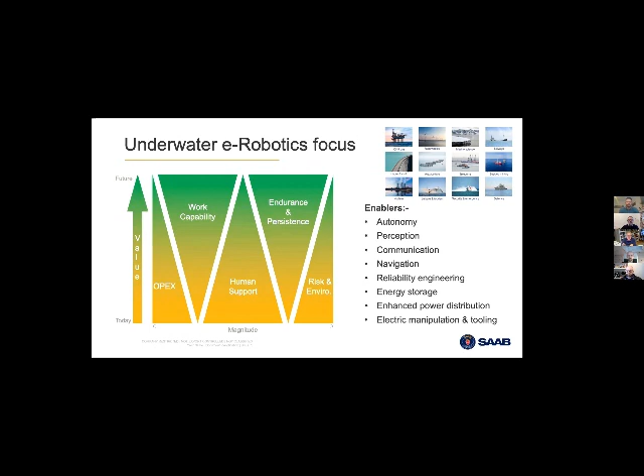Whatever the operational scenario, or indeed the market sector, whether it be offshore energy, defense, marine science, or others, the drive with these developments is much the same. It's to increase the operational value of the robotic system through the reduction of operating costs, increasing work capability, reducing human support, increasing endurance and persistence of robotic systems, whilst at the same time reducing risk and impact on the environment. These are some of the key enablers that support this plan, and I'll touch on developments relating to most of these during this presentation. So firstly, looking at the development of conventional tethered electric ROV systems.

Observation tasks have been the domain of the electric vehicle, while survey and work tasks have generally been the domain of the hydraulic vehicle, and this has been slowly changing over the years. Electric vehicles first started life as pure inspection vehicles carrying a camera and maybe a sonar, but they soon grew in size and capability and intelligence, and before long, compact work vehicles were introduced that could carry a reasonable amount of tooling. And so the lines between observation and work class vehicles started to become a little blurred.

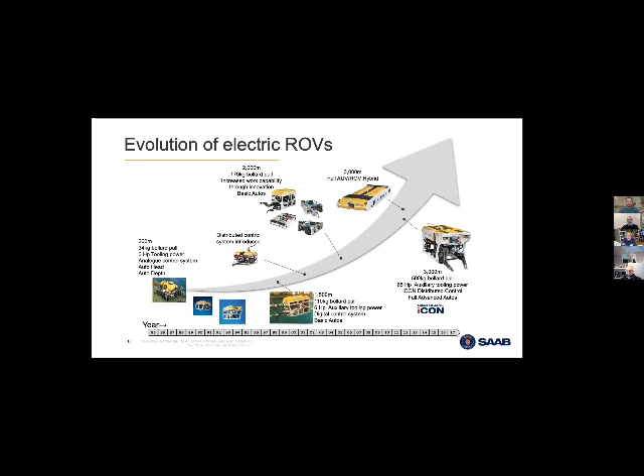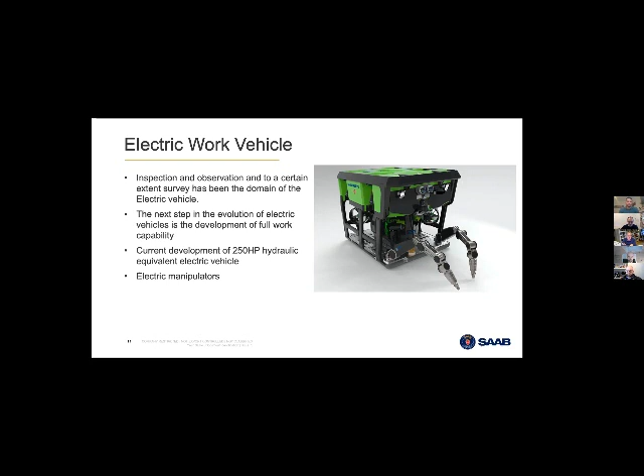Today, we have proven autonomous vehicles that can carry out extensive survey work, and electric work vehicles that can perform all but the most demanding of work tasks. So what's next? Well, the next logical step is the development of a full-blown electric work vehicle that can carry out all tasks conventionally done with hydraulic work vehicles. There are already several fairly large and capable electric vehicles working in the market today, and our latest development is an all-electric equivalent of a 250 horsepower hydraulic vehicle. In this case, it has electric manipulators.

So why go for an electric solution? Well, apart from generally having a lower cost of ownership, there are quite significant environmental benefits. Less oil, lower risk is a benefit, and they're generally more efficient, requiring less power, which for some of these modes of operation is really important. Another key reason is that it's easier for more digitalization and automation, which really helps unlock these remote and autonomous modes of operation that I'm going to talk about.

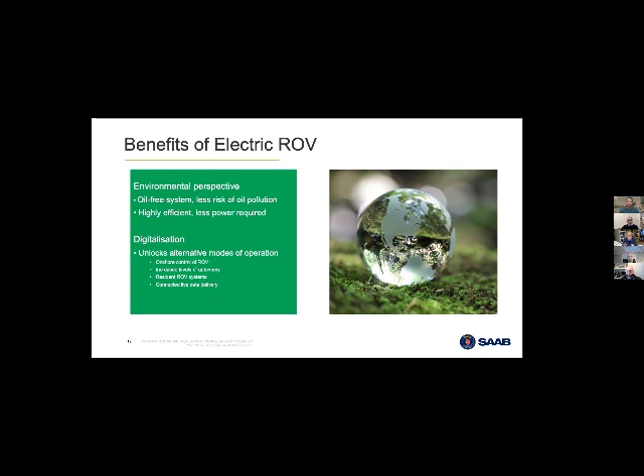One of the main challenges, however, for the electric work vehicle is tooling. Much of the tooling on the market today needs a hydraulic supply. However, most tools actually require a relatively small amount of power compared to propelling the vehicle. So a relatively small HPU can be used to deliver what's required for most tooling.

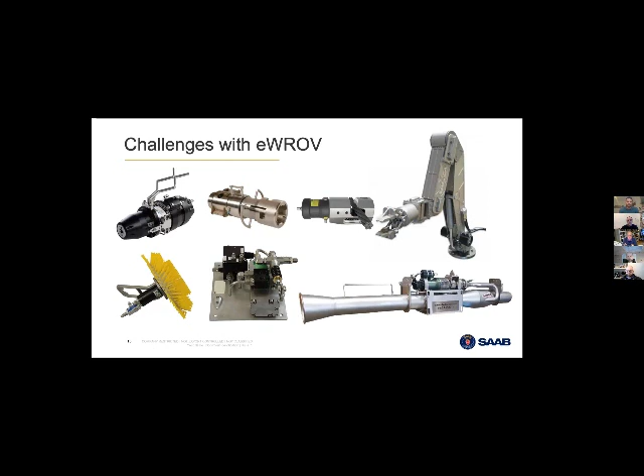In the past, the challenge with electric thrusters has been the power output when compared with hydraulic thrusters. To date, most electric thrusters have lagged behind hydraulic in terms of performance, but our latest SM14 thruster is able to produce a higher thrust output than a similarly sized hydraulic equivalent, so it's a win-win with higher efficiency and higher thrust. But to really maximize the potential for electric vehicles, the tooling needs to be electrified as well.

Electric tools for some tasks, such as cleaning and pumping, have been around for a while, and several electric torque tools are now available, which are smaller and lighter than their hydraulic equivalent. But a key development has to be the manipulators. Today, with the rapid advances of robotics above water, there are less technical barriers to achieving the required underwater ROV performance.

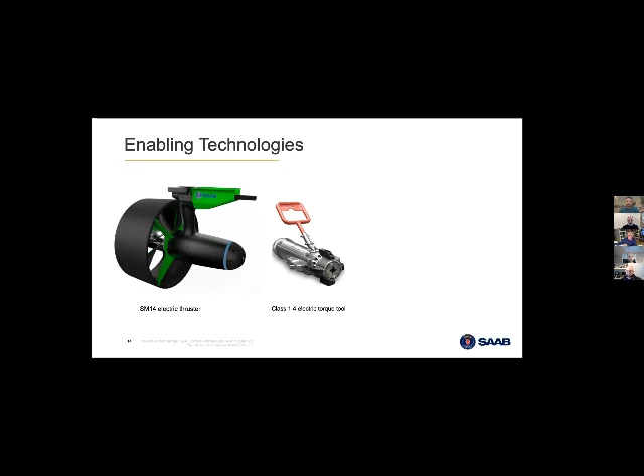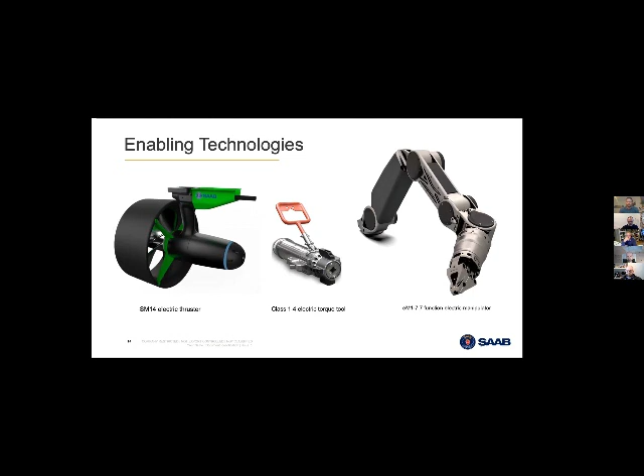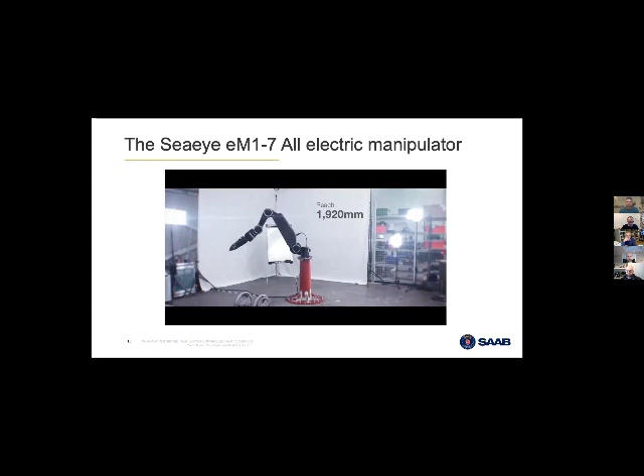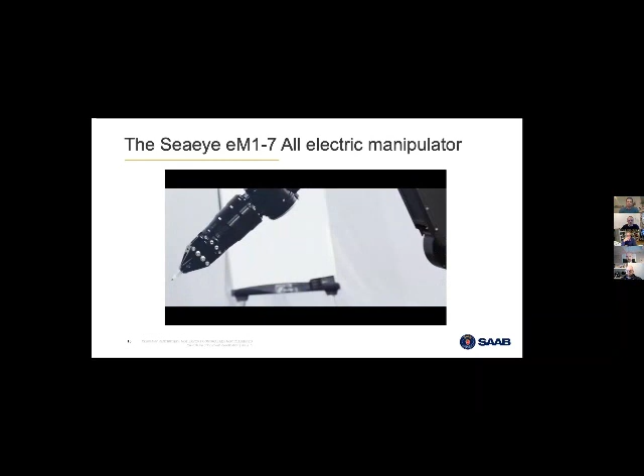The image on the right is of our latest 7-function electric manipulator, which exceeds the capability of the current industry standard hydraulic manipulator. Being electric, it has the same benefits as an electric vehicle. This video shows the eM1-7 electric manipulator in action. One of the key things about this manipulator is the repeatability of its position. And this is really important for developing autonomous and step-by-step semi-autonomous operations.

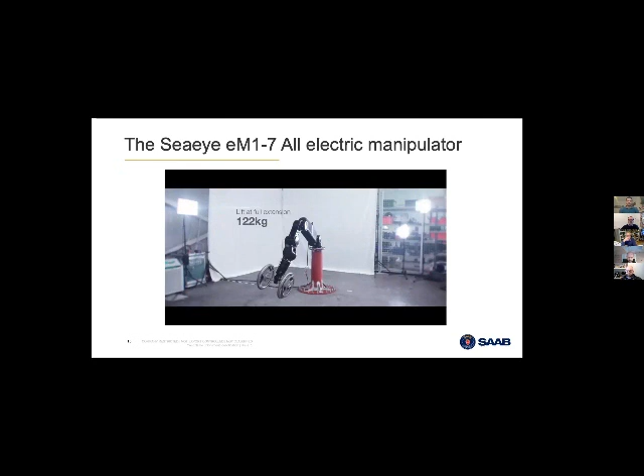It's been something that's been talked about for quite a few years, but the next developments relate to ROVs and vehicles being hosted for unmanned and lightly manned vessels. It's really starting to gain traction in the industry and is a significant cost saver. To illustrate Saab's developments, I'm going to talk about a multi-shot mine neutralization system, which is a defense program developed to produce an ROV deployed over the horizon from an unmanned surface vessel. It's a joint UK-French development program involving Thales, ASV, and Saab.

The objective of the system is to be able to relocate a potential mine found via sonar, identify the mine type, and then dispose of or immunize and support recovery operations of that mine. One of the biggest challenges is that those operations have to be conducted in up to 4 knots of current and up to 300 meters water depth.

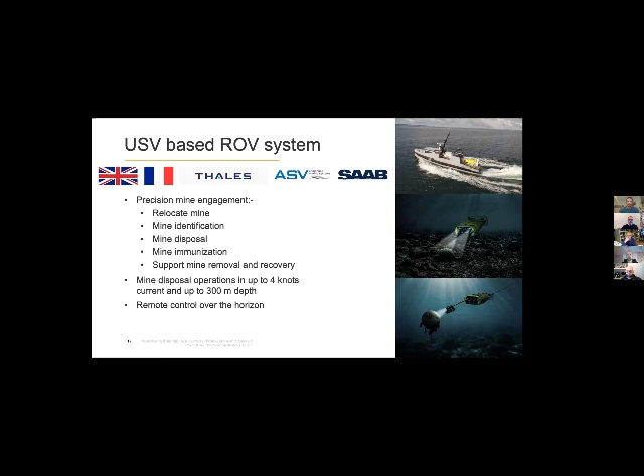Another big challenge is that it has to conduct operations over the horizon, away from the mother MCMV vessel. Whilst a vessel is still required today to control the unmanned surface vessel and the ROV system in this particular case, the main benefit of the system is to take that $200 million vessel away from the minefield and, more importantly, remove the operators from the vicinity of the minefield.

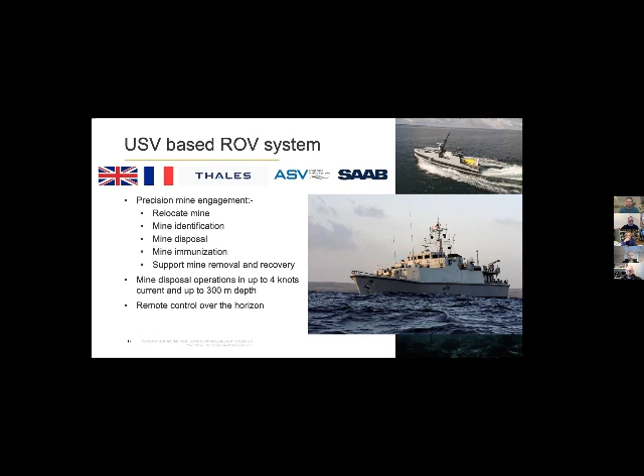As I say, one of the biggest challenges was the need for over-the-horizon operation via a radio link. The link between the host USV and the mother vessel suffers from relatively low bandwidth at 3 megabits per second with a latency of 250 milliseconds. And in bad weather, 100% uptime cannot be guaranteed. Whilst the vehicle is remotely controlled with a human in the loop, the MCM vessel personnel have much else to concentrate on, apart from the complex task of flying a remotely controlled vehicle that's located miles away.

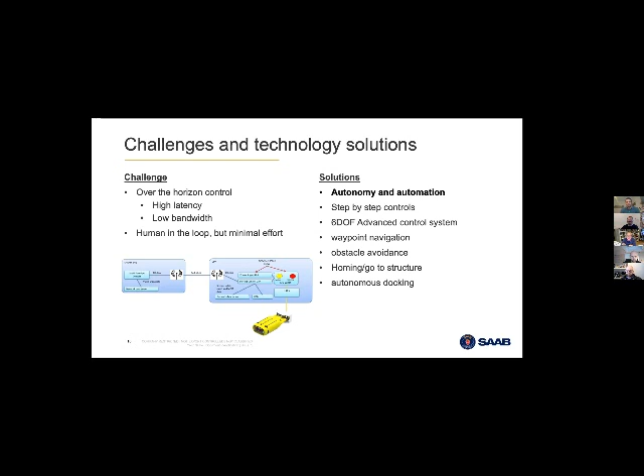The solution called for a change of mindset from a conventionally controlled vehicle to an autonomous vehicle with closed loop positional control that can be supervised by a human rather than directly controlled by the human. The MCMV operators, potentially managing multiple assets at the same time and potentially not being ROV experts, require the use of autonomous behaviors during the operation and launch and recovery. Here, hopefully, you can see the system undergoing sea trials.

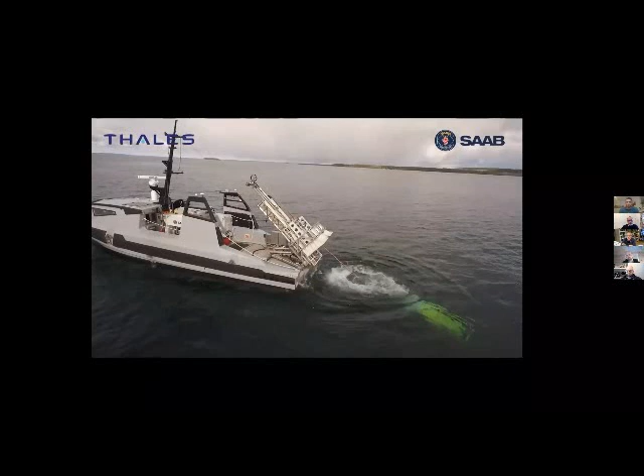Firstly, there needs to be a command decision to prepare and then launch the vehicle once the USV has arrived on location. The winch, tether, and vehicle all have to be managed simultaneously to ensure no tether entanglement with the USV thrusters. The vehicle executes the launch automatically and then goes to a safe distance from the unmanned surface vessel. Next, the vehicle transits to the suspected target with waypoint navigation and obstacle avoidance.

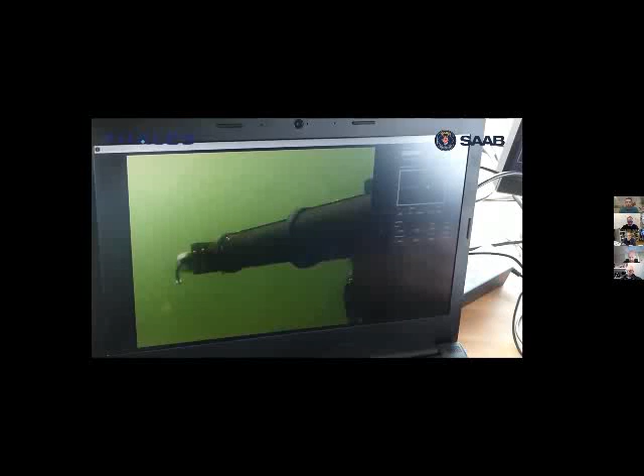And then the mine inspection is automated, and any engagement with it is handled by step-by-step control. Having placed the charge, the vehicle transits to the next target, repeats the cycle, and then ultimately, having deployed 3 charges, returns to the USV for automatic recovery and reloading.

There's a need for fallback behaviors should the comms link fail and to minimize the operator workload. So returning to the USV for recovery also needs to be automated.

Another similar program we've undertaken is with Boeing for a submarine launch vehicle system. The aim of this system is to be able to conduct inspections or intervention tasks anywhere from deployment from a submarine that can travel for some weeks, covering a distance of thousands of miles. The removal of a large surface vessel and associated crew obviously has the potential to save substantial operating costs, as well as the possibility to conduct discreet operations.

Due to the remote nature of the submarine, the comms link to the submarine is via a satellite link. And in order to operate over that kind of link that has limited bandwidth and very high latency, the advanced vehicle control system allows for station keeping, again, with measured step-by-step control and point and click operations to guide the vehicle to the task. Meanwhile, a single video and sonar link are transmitted back for confirmation of the last control inputs before taking the next step.

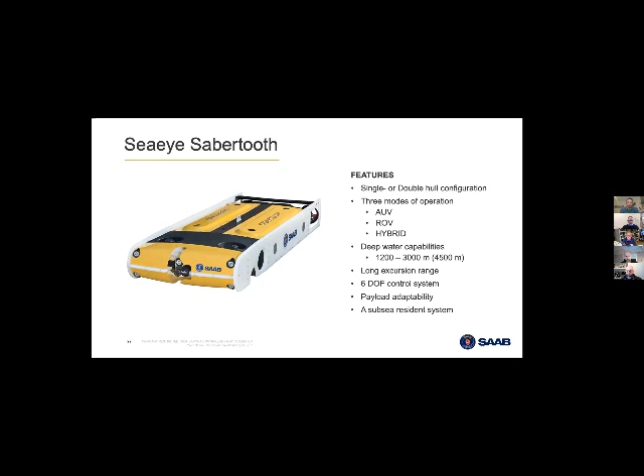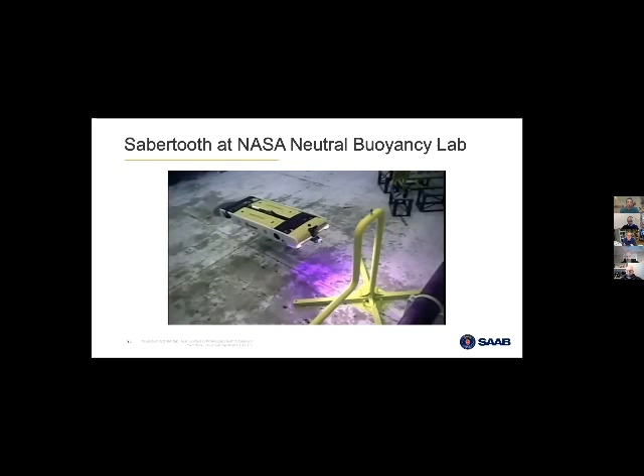Many of you have probably seen this video already, but it's the best I have showing the capability in clear water. And although it's a few years old now, it's still very relevant to the developments of today.

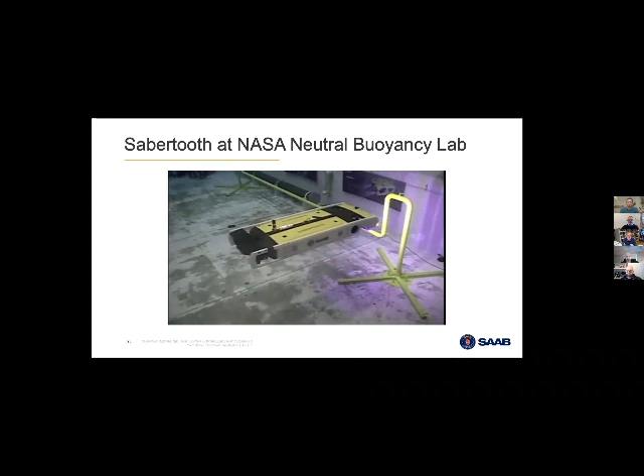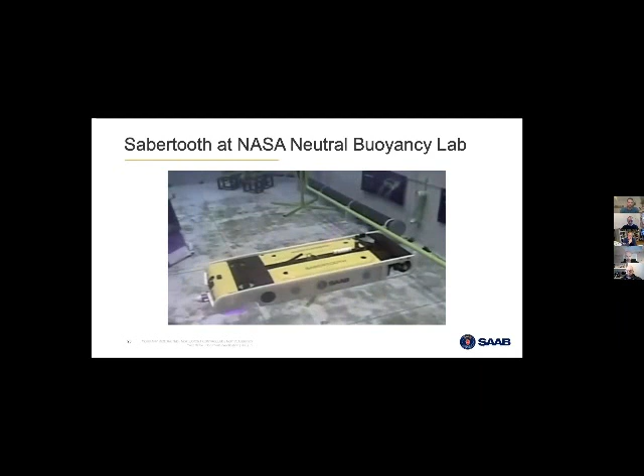So what are the challenges? Well, industry adoption is one challenge. There are now quite a few systems operating, but most are conducting fairly shallow water survey operations. Another big challenge is working at depth.

Recently, we've been running both autonomous and tethered operations at 2,000 meters at speeds of up to 4 knots, whilst maintaining basic communications and positioning from the surface. The high-speed descent of this kind of vehicle is typically 3 times the speed of a winch, so operating without a tether can improve operational efficiency.

The final development I'd like to talk about is subsea resident vehicles being installed long-term on the seabed. Vehicles of both the autonomous and semi-autonomous variety, resident on the seabed for extended periods, again have the obvious potential to save significant vessel costs. One of the key enablers for resident systems is docking.

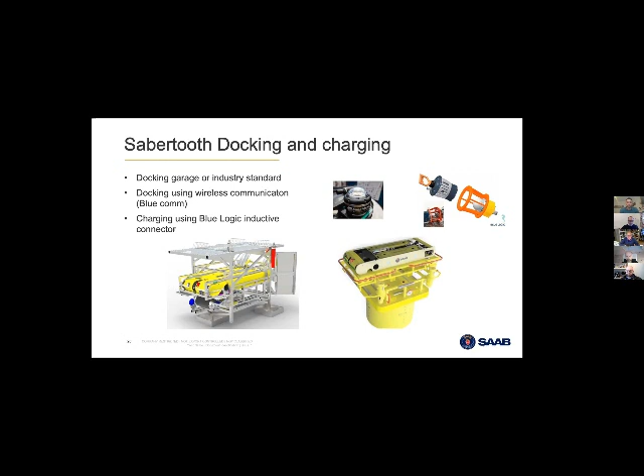And here you can see both an in-house developed docking station on the left and the Equinor standard docking station on the right. In order to control, charge, upload and download mission data, a safe vehicle dock is required, and there is benefit in finding and locating the docking station autonomously, either for efficiency or in the event of a loss of communications. In these 2 examples, docking is controlled by a pilot using step-by-step controls through a Sonardyne BlueComm free space optical modem, and data download and charging is achieved using the BlueLogic inductive connector.

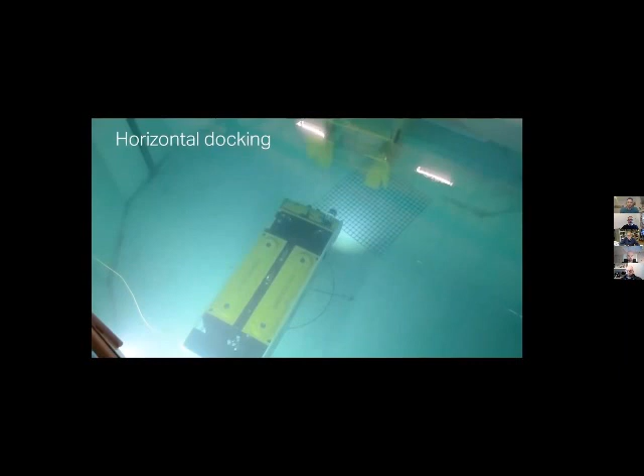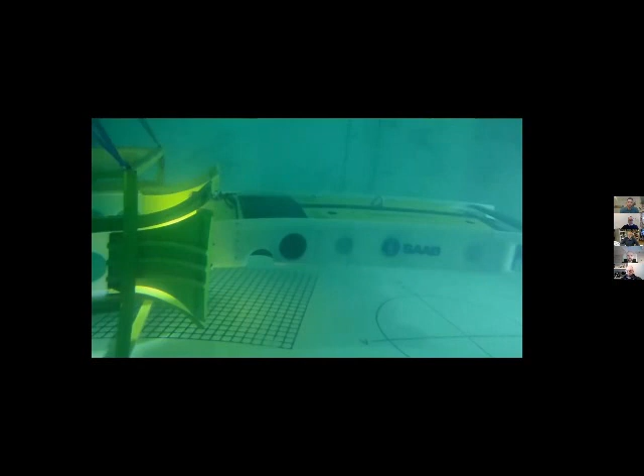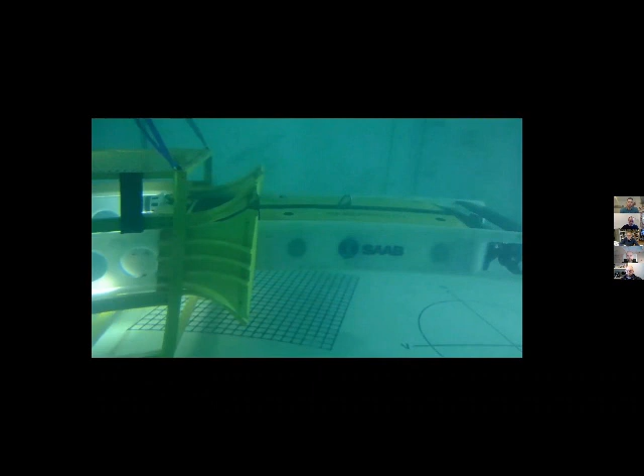To show the docking for real, I have a short video. In this clip, you can see the vehicle and docking garage in a clear pool for illustration, but it's routinely conducted at sea. This is in manual control, but it's already been successfully done many times autonomously using the docking garage arrangement with twin acoustic transponders mounted on the mouth of the garage. You can see the BlueLogic connector mating with the docking garage configuration for data transfer and charging.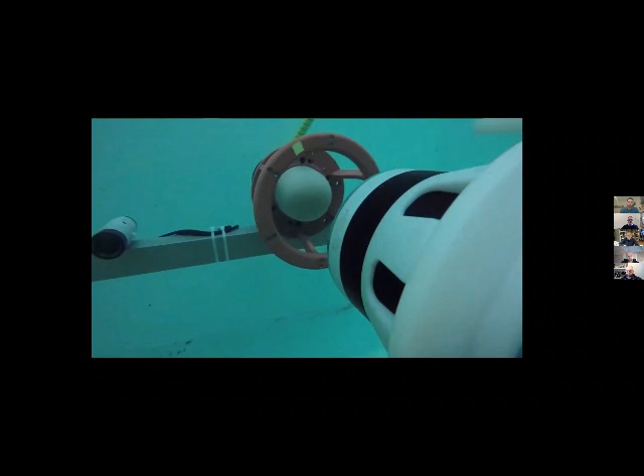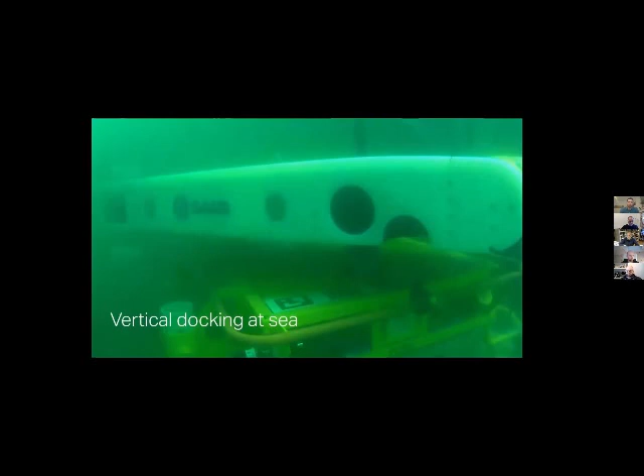In the second clip, the vehicle is docking vertically to the Equinor docking station without physical guides. This is under step-by-step control.

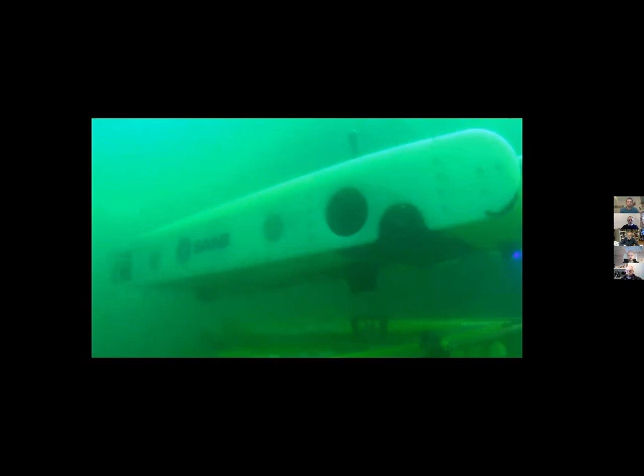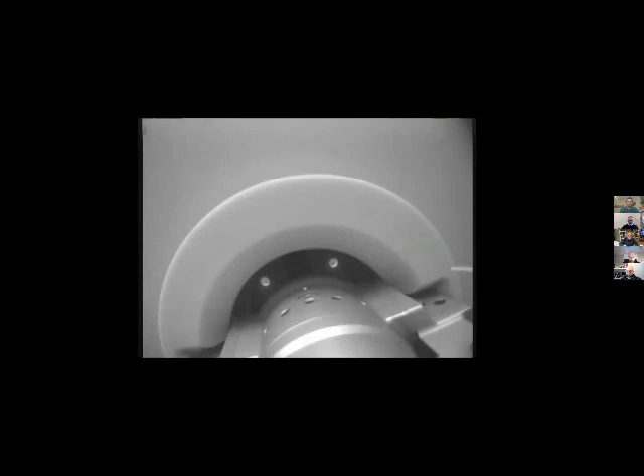As the vehicle undocks to fly away, you can see the BlueComm system used for transmitting the control and video link between the untethered vehicle and the docking station. And then in this final clip, you can see the mating of a torque tool on the front of the Sabertooth into a receptacle on a valve panel. Again, the BlueComm was used for control comms and video with the optical transponder mounted on the valve panel.

The next step is auto docking. With further work and suitable sensors defined, it will soon be very possible to dock autonomously to Equinor's standard docking station. Several challenges have been set by Equinor, who are driving towards resident systems, and these are now being accomplished.

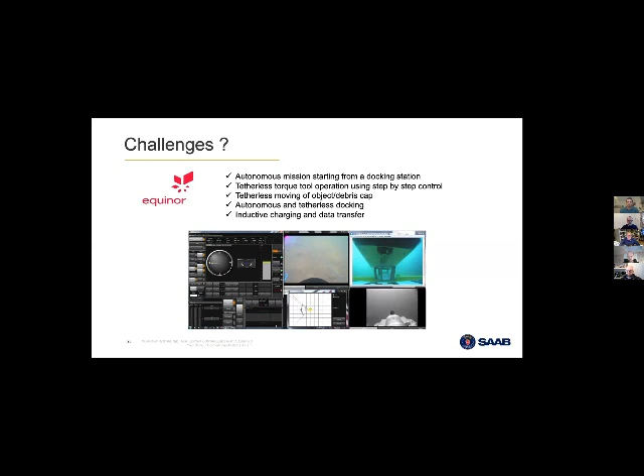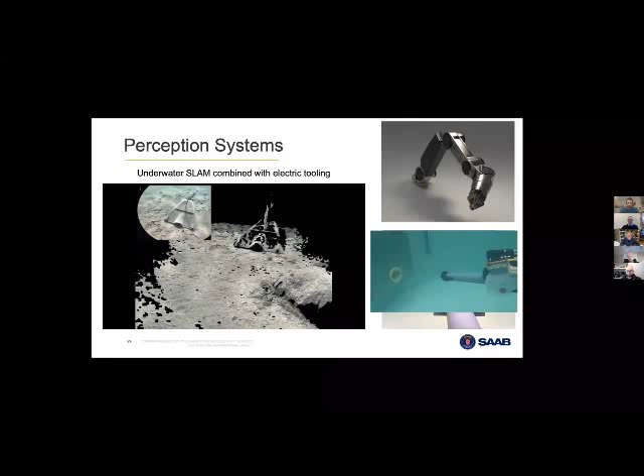Saab has a 3D visual-based underwater simultaneous localization and mapping system, or underwater SLAM for short. And this advanced system builds up a 3D point cloud of the environment in real time. The green snail trail here shows the position of the vehicle sensor relative to the surrounding point cloud. As well as a means of object tracking and vehicle station keeping, the operator can interrogate the point cloud data in real time to help classify objects.

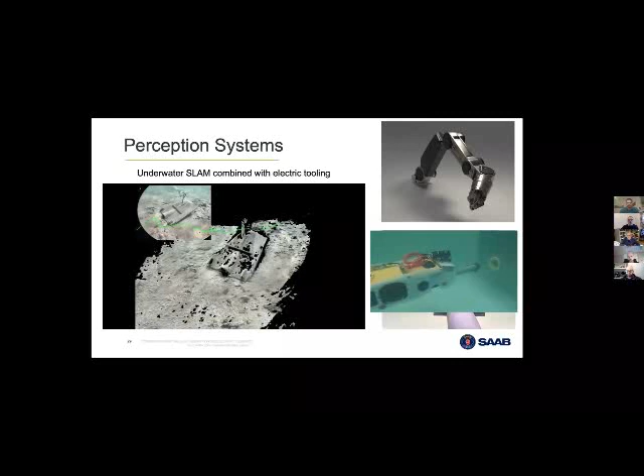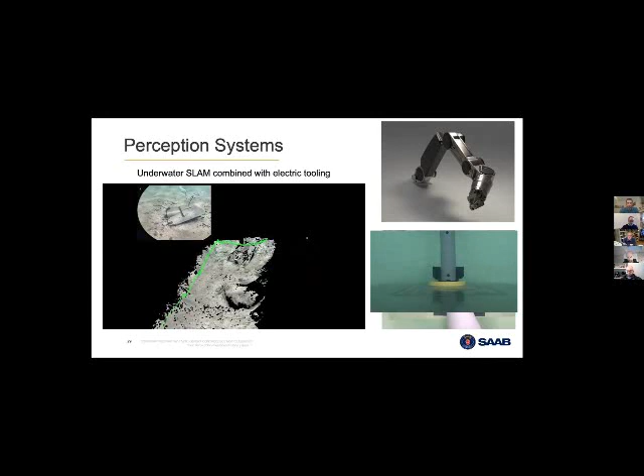With this accurate real-time 3D data acquisition on the vehicle possible, combining it with precise electric tools such as the electric manipulator and torque tool will soon be allowing automated manipulation of objects and valve operations to be even more efficient. And finally, the video clip on the right is from trials where an ROV system was positioned using this 3D SLAM system and automatically inserted a torque tool into a receptacle. Again, really important for low bandwidth connections.

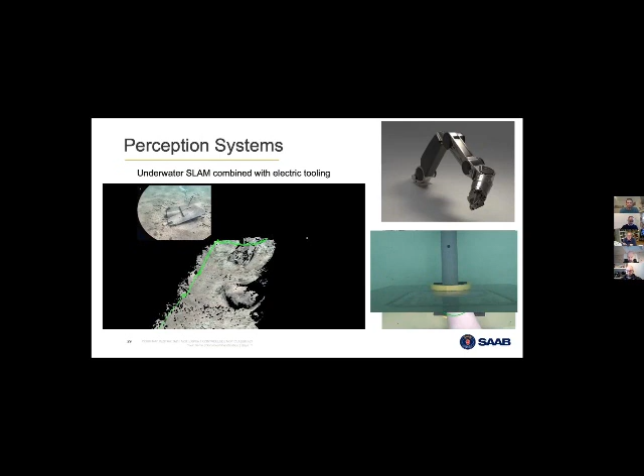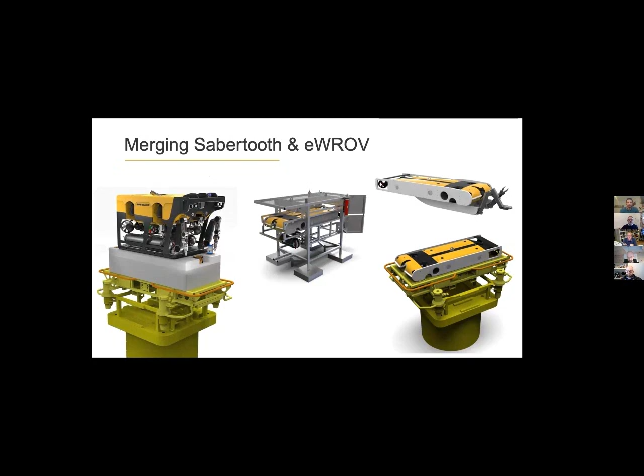Finally, we're looking at how all of these technologies and the vehicle platforms themselves converge. Some of the work going on just now is to augment the Sabertooth hybrid vehicle with more tooling, and even to augment the ROV with batteries and autonomy to facilitate tetherless resident operations. So I hope you can see how all these developments in the electric vehicles, the manipulator, the autonomy and automation, the perception and comm systems do indeed all come together for complete electric underwater robotic solutions that can reduce the dependence on vessels and people offshore to save cost, increase safety, and reduce the carbon footprint of underwater operations.

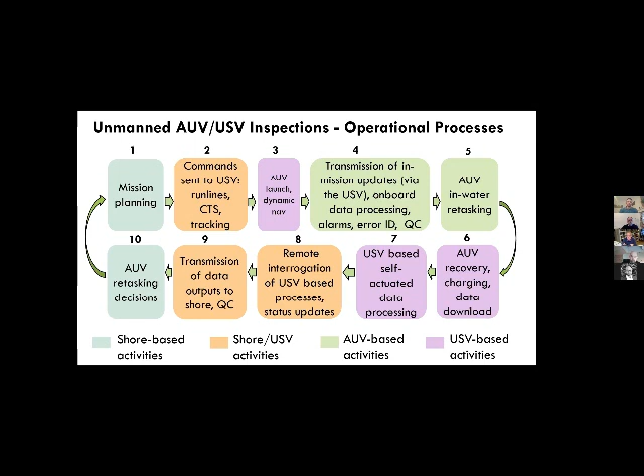So running through the objectives of the project in very brief, primary objectives of the first two phases of the project, which was undertaken, were process and procedure development for unmanned subsea pipeline inspection, utilizing the combined USV AUV survey platforms with operations control from shore. Development of software and functionality allowing pipe tracking, automation of eventing, alarm generation, automated data processing workflows, QC and analysis, navigation aiding, and in-mission retasking.

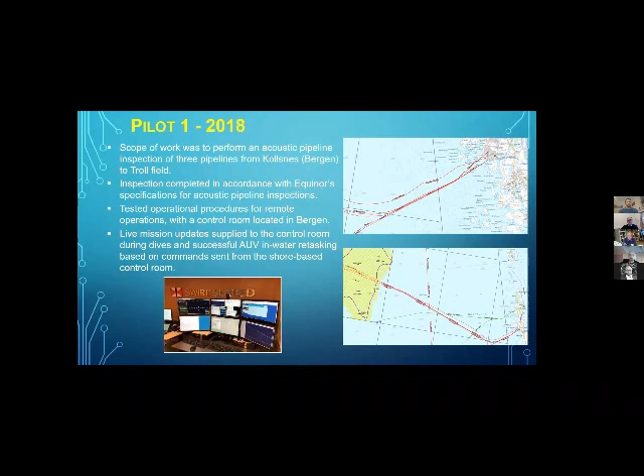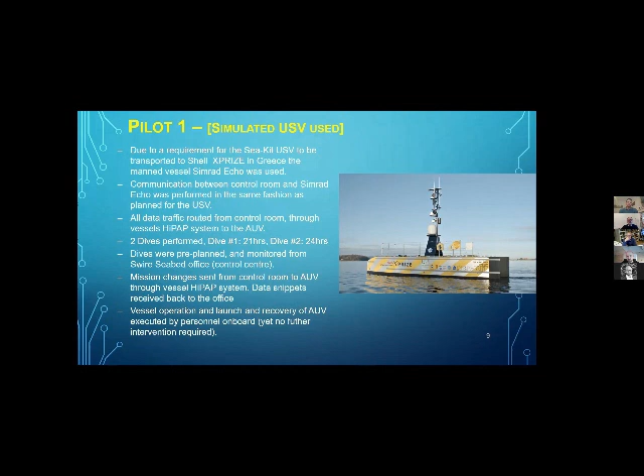In pilot one, the SeaKit Maxlimer USV was planned for the project, yet due to a clash of timing, was not available. As a result, we needed to resort to using a manned vessel, which simulated the role of a USV. Operations were still completed in the same manner with command and control situated on shore, major change being manual AUV launch and recovery. There's the vessel which was used.

In, one second, sorry.

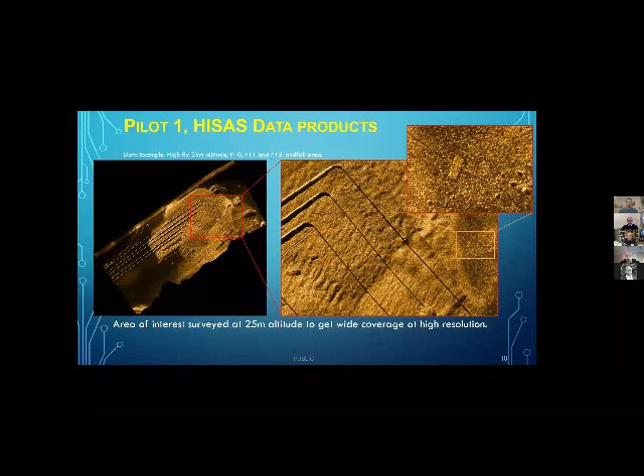Yeah. Here is an example of some of the data collected during pilot one, taken from AUV HISAS at 25 meters altitude. Multi-beam echo sounder data clearly reveals an area of free span detected on one of the pipeline routes. An example image of an area of interest collected by AUV payload cameras.

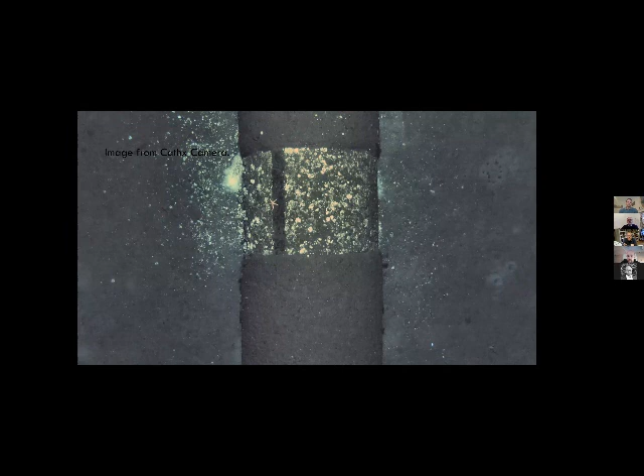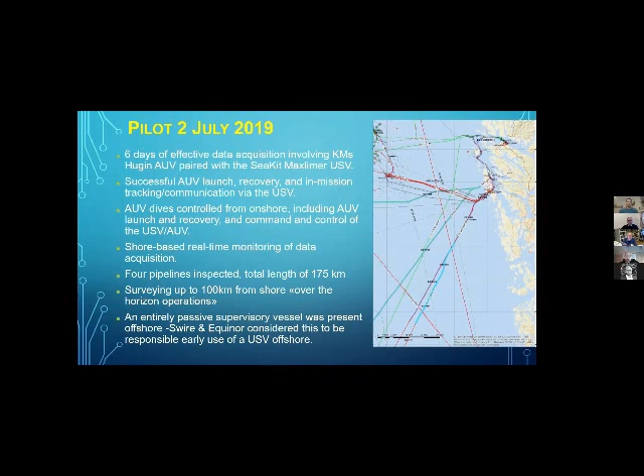For pilot two, we were able to utilize the Hugin paired with the SeaKit USV. During missions, successful unmanned launch and recovery was completed offshore. Data acquisition was controlled and monitored from shore, and 4 pipelines with a combined length of 175 kilometers were surveyed. The operation boasted a world first for over-the-horizon commercial pipeline inspection using unmanned platforms, with pipelines being surveyed up to 100 kilometers from shore. This video was taken during pilot 2 and shows offshore unmanned recovery of the Hugin by the SeaKit USV.

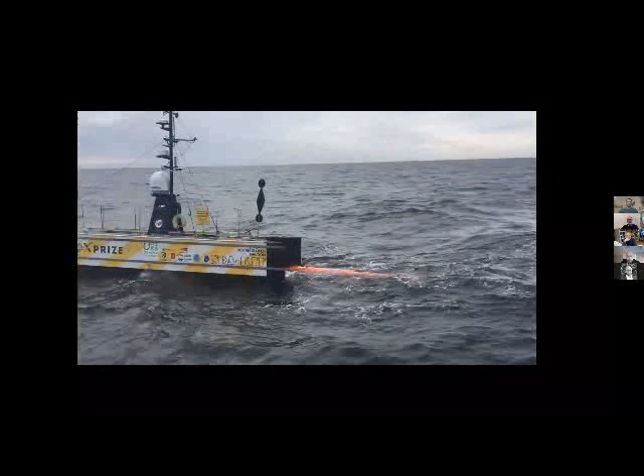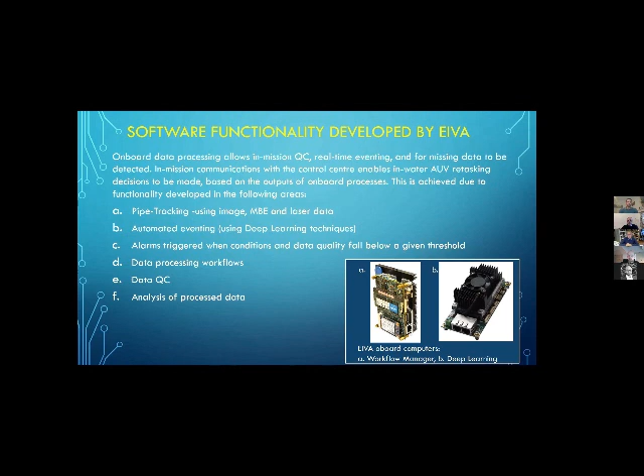During the project, EIVA developed software functionality which was installed on 2 boards integrated into the Hugin AUV. During the pilot projects, the deep learning board was used primarily for pipe tracking using image data, and the workflow manager board enabled data processing to begin on board the AUV, for alarms to be communicated to shore, and for data QC and analysis. You can see below an example of the deep learning pipe tracker method implemented on the deep learning board, which ran in real time during missions. Results generated from this allowed identification of top of pipe.

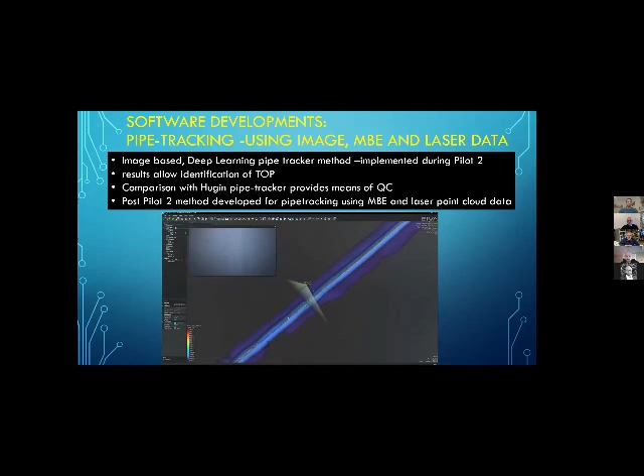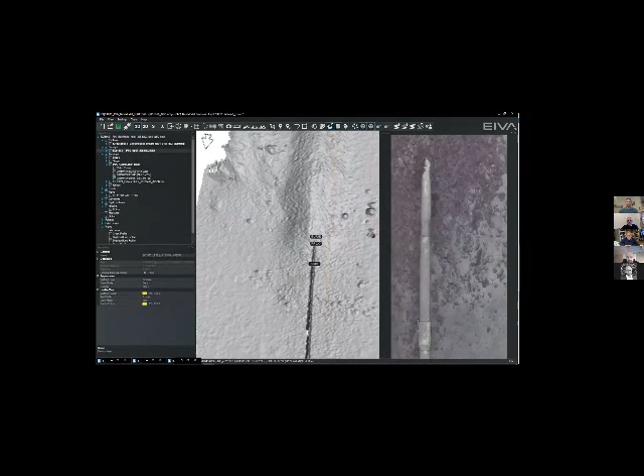Further pipe tracking methods were implemented and tested in simulator dives following Pilot 2, which used multi-beam and laser data. Here's an indication of pipe tracking using image and multi-beam data, as referred to, with events generated using deep learning processes. These were labeled on screen here, and clearly reveal where a section of pipe enters into burial. Another fly through, this one combining DTM data linked to the image data on the right there.

The deep learning methods developed by EIVA were implemented offline during the course of the project. That's the eventing methods, with the long-term objective of migrating these processes to the deep learning board on board the Hugin eventually. The methods proved effective in identifying field joints and anodes, and in addition to providing event listings, functionality was developed to use the detected features for navigation aiding.

Post-Pilot 2, identification of anodes, then the subsequent comparison of their known and observed position could be used as a navigation check. And again, the long-term aim with this would be to use this data as an input for dynamic navigation aiding of the Hugin.

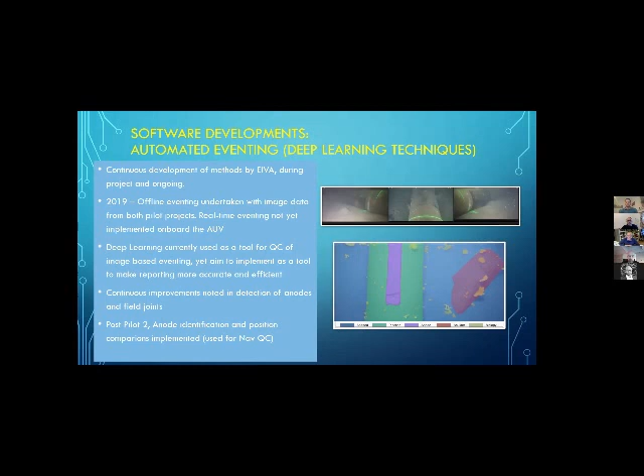The Workflow Manager board enabled alarm generation. It was possible to transmit these alarms to the surface via a low bandwidth acoustic link, which could then inform operators of a number of critical conditions, such as lack of multi-beam coverage, poor visibility hampering collection of image data, pipe not detected, and missing sensor inputs. The alarms were used for informing the operators onshore. However, the long-term plans were to configure these outputs with the AUV control system to form operational inputs, furthering automation.

The Workflow Manager board installed on the Hugin enabled data to be successfully processed on board the Hugin AUV as collected during missions, and enabled this processing to be continued onshore post-mission. An automated workflow enabled data processing, cleaning, and QC, and post-Pilot 2 functionality was developed, allowing automated processing based on pipe diameter once the top of pipe was determined from pipe tracker data.

The QC component advanced on the Workflow Manager board is essential to further levels of automation possible. These form inputs to decisions to resurvey sections of pipeline, for example. In the future, the outputs of such processes will form vital inputs to automated retasking procedures.

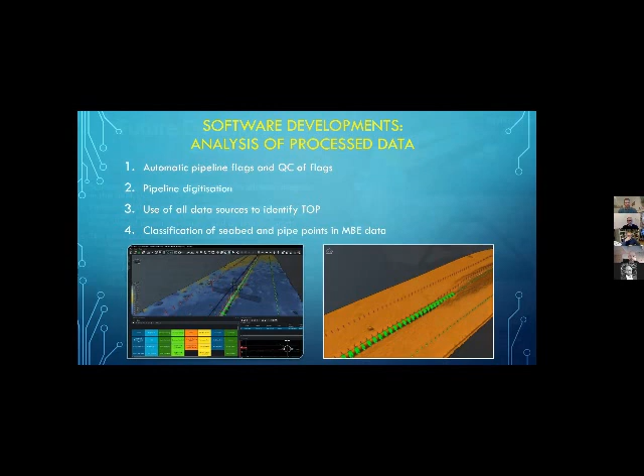I've explained to you what was achieved in the Unmanned development project, which ran between 2018 and 2020. Despite this project having ended, in the words of a great man, now is not the end. It is not even the beginning of the end, but it is perhaps the end of the beginning. Work in this field is progressing rapidly, and in the last few months at Samara, we have initiated collaborations seeking to progress this work further. The benefits to clients are clear: reduction in costs, vessel time and man hours, and reduction in environmental impact. A significant distance is yet to be covered along this road to automation though.

At the moment, we're able to complete unmanned operations with humans in the loop as remote decision makers. In the near future, we aim for automatic in-mission retasking of unmanned maritime systems, allowing larger work scopes to be completed. The ultimate goal, though, is for the role of humans in this loop to diminish to a level where we are only required to oversee operations.

In our work going forward to enable this, we have identified 5 key areas which need to be focused on. These are hardware development, onboard USV IT infrastructure and maritime communications, further automation of data processing and QC, navigation aiding and adaptive control, and machine learning and deep learning used for eventing, interpretation and implementation of automated change detection processes.

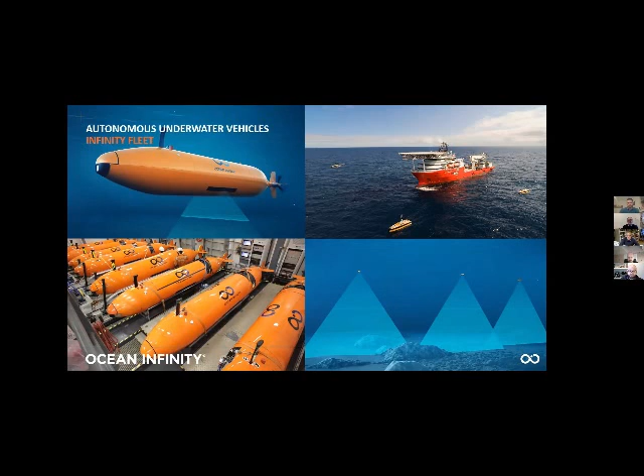Our ethos is that the use of multiple unmanned and uncrewed systems for force multiplication vastly increases the efficiency in project delivery. And through this, we've logged more commercial AUV hours than anyone else, allowing us to really get to grips with our own equipment and get more and more out of our technology. However, 18 months ago, we made the decision to grow a complementary, truly robotic business, further reducing offshore personnel and achieving a greater level of sustainability for marine operations. And so was born the Armada fleet. As it says there, it's a new venture for Ocean Infinity, launched earlier this year in February.

And the idea is that we want to be operating the world's largest fleet of low-emission, multi-role robotic ships. An initial fleet of 21 and 36-meter vessels that can be deployed worldwide are currently under construction, and we're focusing on the significant reduction of emissions, increased safety, secure and reliable communications, and leveraging those economies of scale.

We'll be deploying revolutionary fleet technology capable of shallow and deep water survey, as well as combi systems to remotely provide ROV, AUV, and UAV payloads. And as I said, with the fleet currently under construction, we will be fully operational in early 2021.

Now, we want to get away from the idea that these are USVs. Yes, they are uncrewed. Yes, they are surface vessels. However, they're a very different beast to the traditional sub-15-meter USVs currently on the market. They're proper ships. They're being built at a proper shipyard in Norway with a rugged, ocean-going design, and they'll be capable of handling sea states comparable to larger traditional survey vessels.

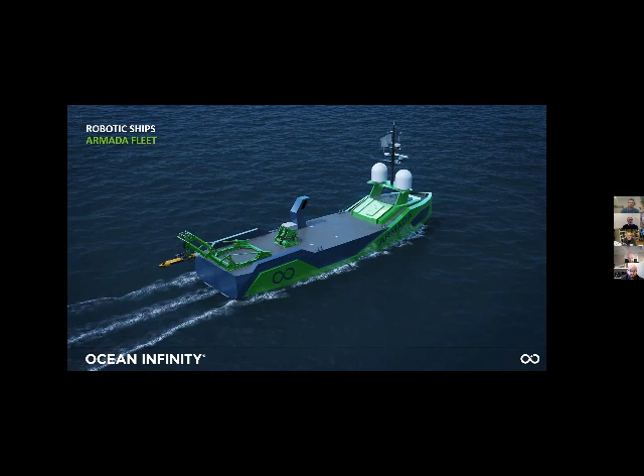Initial vessels are being built in 2 classes. As you can see, the A21 will be capable of holding station, but will not be a certified DP vessel, whereas the A36 will be fully classed and certified DP2. They'll be capable of transoceanic passage with extended range and weatherability, and are classed and assured as you would expect of a vessel of this size.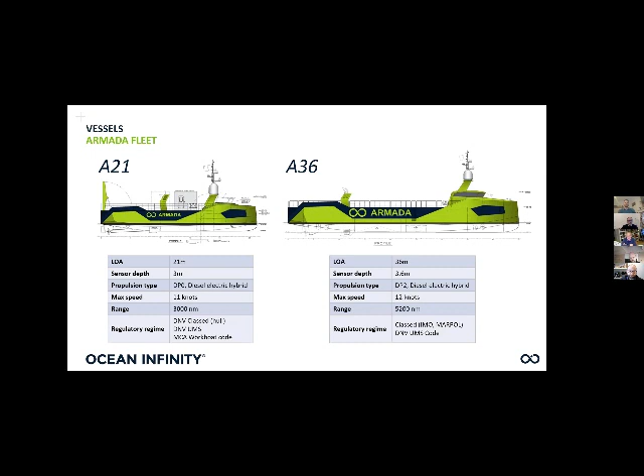One further point to note is they'll be flagged in the UK, to take advantage of the world-leading focus on marine robotics and uncrewed systems that we have here in this country. Now, as you can see, our first vessels are under construction in Norway, and as I said, they will be delivered in early 2021. That's the first 2 vessels, and then we have a program of launches scheduled throughout the year to deliver the full fleet.

Now, we're working really, really closely with the shipyard, even in spite of the coronavirus pandemic and everything else, to ensure that when these vessels launch, they will be as good as they can possibly be from day one. We want to be able to commission them, test them, and press them into service for our commercial clients as soon as possible.

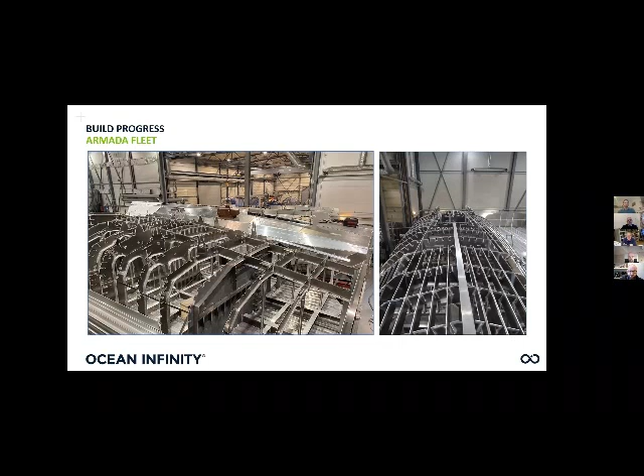Now, just a little bit on the payloads that are going to be possible from these vessels. Each one will have a suite of survey equipment permanently installed in a subsea gondola, and this ensures some of the highest possible data quality. The existing USVs on the market with the best hydrographic data that we've seen come from gondola-based systems. It creates the best hydrodynamic environment, it creates the quietest acoustic environment, and it improves the sea state capability of the vessel.

In addition to that survey gear that'll be permanently installed, the idea is that we will be able to deploy modular payloads to each USV, to each robotic ship. These will start with things like moonpool deployed work-class ROV systems. You heard from Matt that we're looking at using some of the Saab Leopard electric ROVs that he spoke about, but we'll also be repurposing some of the existing Schilling HD hydraulic systems that Ocean Infinity already own. And this will give us work-class ROV capability down to 3,500 meters water depth.

We'll also have single and dual vehicle options on the larger vessel, on the A36, and this will increase our mean time to critical failure. As well as that, we'll be deploying hydrographic and geophysical payloads, towed side-scan sonar or synthetic aperture sonar, magnetometers. We have plans for UXO capability as well to provide that hydrographic and geophysical survey suite. And the third one that you can see there is that we want to be able to deploy deep water multi-beam for full ocean depth monitoring, for transoceanic and deep water surveys.

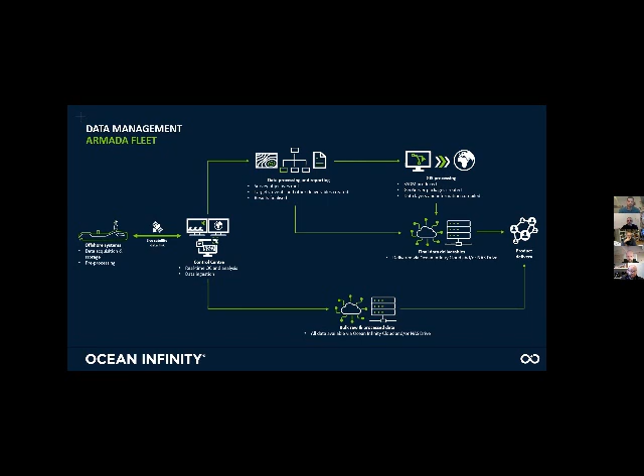Now, we're putting in some pre-processing steps in all that we do, using some machine learning and automation tasks on board the Armada fleet itself, which means that the data will have undergone a series of pre-processing steps before a human has even seen it. And this, along with advanced compression techniques, then allows the data to be brought back in packets in near real time for validation and QC, allowing that analysis I referred to earlier to begin earlier in the process. This is particularly useful for survey and inspection work that informs further campaigns and will allow the shortening and truncation of offshore campaigns even further.

However, as we increase the level of automation and remove some of the subjectivity in that data processing, we're also adding an enhanced level of confidence in the data sets themselves. And we'll do this by providing performance statistics from individual sensors and software packages. This will show sections of data that may be in or out of scope, and will give quantifiable quality information to ensure that world-leading data quality that Ocean Infinity is known for.

We can do things like show instant coverage plots and acquisition statistics to highlight any areas of poor data quality for further review. Or, as I said, on inspection tasks, we can highlight those areas of interest at the point of acquisition to ensure that the most useful and valid data set is indeed presented.

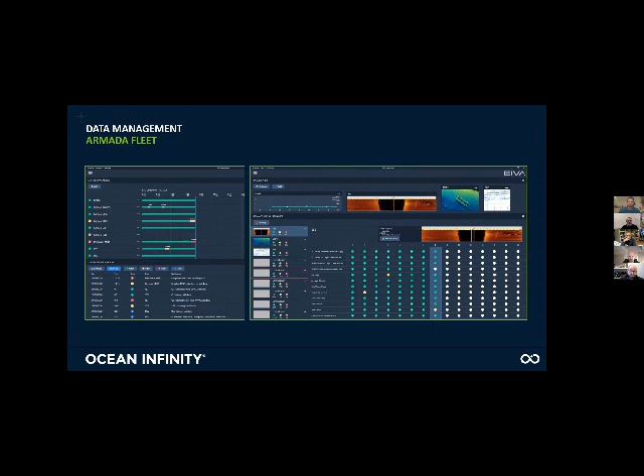Something else that we're hugely proud of at Ocean Infinity is our commitment to sustainability. It's something that we believe should be truly at the heart of everybody who operates in the marine environment. And as such, we've built the Armada fleet with a huge focus on sustainable credentials. So we've done some pretty advanced tank testing based on the Armada robotic fleet ahead of delivery. And we will be validating these numbers as soon as the vessels launch in early 2021.

Now, we can break down the advantages into three different sections. Firstly, there's a reduction in vessel propulsion requirements. This is fairly simple to understand. The Armada fleet has brand new diesel hybrid engines.

They're smaller, they're lighter, and you're not having to carry around a superstructure acting as a hotel for 30 people. The vessel design focus also shifts to a data quality model, allowing data to be collected from that smaller vessel, and all of that adds to a lower fuel burn and therefore a lower emission statistic.

The second section is those personnel requirements themselves. You're not running a hotel for 30 people. You're not running the galley, the climate control, the gym, the sauna. And because the disparity between onshore and offshore power generation is so inefficient, running that op center and running the facilities for those 30 people onshore is far more efficient and requires far fewer emissions than it would do using marine generators offshore. And lastly, there's no requirement to change the crew every 28 days.

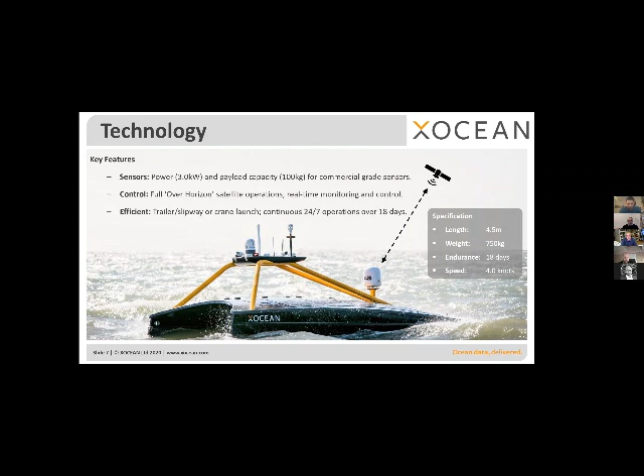We're operating 24/7. One of the nice things about operating 24/7 around wind farms is that all the crew transfer boats go home when it starts to get dark, and you can move around the wind farm quite happily on your own at night, which is kind of nice.

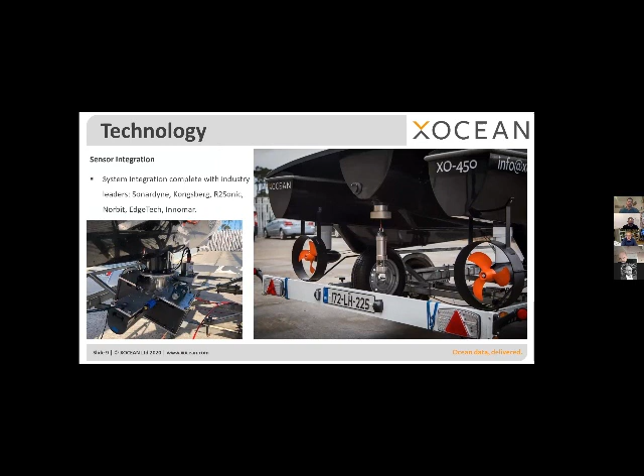The USVs are equipped with various hull-mounted sensors. We can pretty much put anything on them. There's an underway CTD that we deploy from it. Depending on what the job is, we pick the right sensor for that job. With the USV pilots, we always have a human in the loop when it comes to navigation and looking out for other vessels and things like that.

But the actual data collection we're trying to do as autonomously as possible. So the boat is uncrewed but manned remotely, but the actual operation we're trying to do as autonomously as possible. So to do that, certainly on the hydrographic wide area surveys, we're implementing the latest QPS Qinsy auto swath system, which calculates the next survey line based on the previous sonar coverage.

And that's within an area that we survey, and at the end of each line, the data automatically stops logging, makes a new line, starts logging, so we can operate this pretty much hands-free all the way through the survey. We've also been operating multiple USVs to either maximize data gathering weather windows, or just because it's a more efficient way of operating.

And all the data we've collected for these surveys is to normal IHO Order 1A standards or special order, and it's all QC'd and verified by the various government agencies that collect that data. Some of the advantages of this are we've collected over 10,000 hours on the MCA Civil Hydrography program, which has been fantastic for developing the technology as much as also just collecting fantastic data.

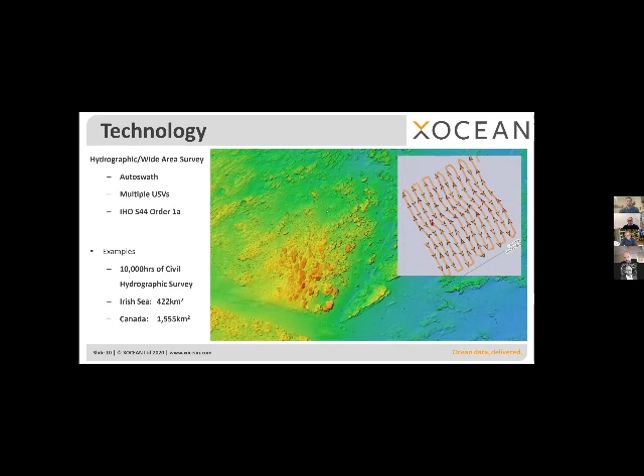We fitted the systems with sub-bottom profilers for doing asset inspections for depth of burial, but also for pre-lay geophysical surveys and things like that. We're standardizing on the Innomar standard at the moment with the 450s, which is giving us great data.

And then we've also added onto the fleet of USVs, UAVs, drones, and in this way we can fly the drone at low water to capture as much as we can, as well as high resolution aerial imagery. And then we bring the USV in at high water, we overlap the two data sets together, and it produces a seamless model between the two. So the pipeline and cable engineers don't have to worry about trying to mix and match the land and the sea together, they have one seamless model of the whole area.

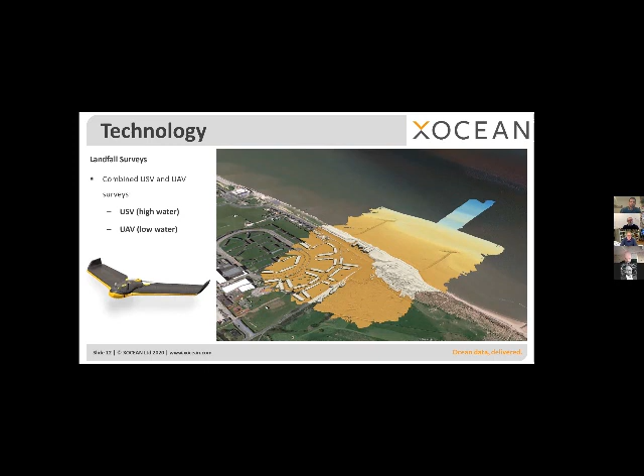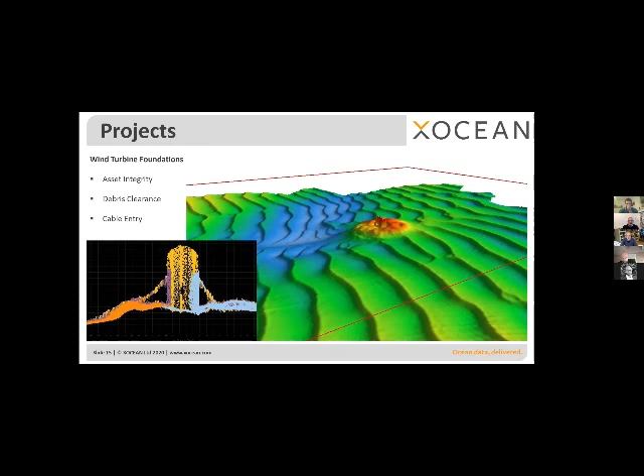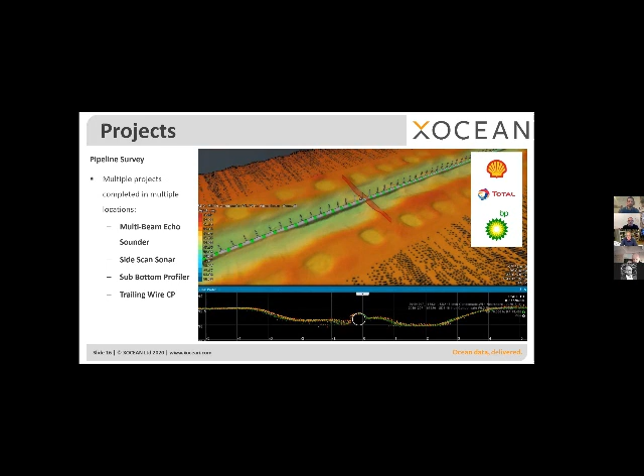So we go up one side and we come back down the other, and you should have one pipe, and they should join up, so you get a good data QC as well as good data quality from doing it this way. We've also used the sub-bottom profiler for depth of burial, and we've also done trailing wire CP surveys as well, though that does require a human to be hooking the trailing wire CP up to the USV before it heads out. So not quite totally unmanned in that situation.

This is a project we do for BP every 4 months or so. We've also done it for Shell and we're looking at other oil majors as well. And this is basically data harvesting, going out and checking the transponders on the seabed for whatever they're collecting. So this is a sort of a typical survey for us.

We drive the boat up on this trailer up to Peterhead in this case. The harbour master, because he's interested in the boat, helps shadow the boat out of the harbour, which is normally the area where you have interaction with people who aren't on AIS, like sailors and kayakers. Once the boat's out of harbour, we then hand over control to the USV pilot back in Ireland. We then sail 128 nautical miles out into the middle of the North Sea.

We interrogate those transponders. And one other thing, the very first time we did this, it was the first time they'd been interrogated and one of the transponders wasn't working properly. We're doing this in conjunction with Sonardyne, and one of the Sonardyne technicians actually ended up in a McDonald's because they had better Wi-Fi than at home. She logged on to the boat. We gave her full access down to the seabed transponders. She pushed a bunch of hex code down there, got the thing working again, and we collected the data.

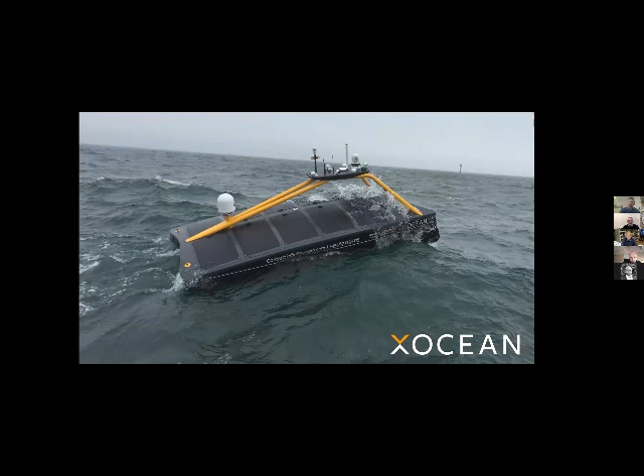Right. So we'll now have 15-30 minutes open discussion, Q&A part. I will start with Matt Bates. I'll ask you a question for your presentation, and then it would be open for anybody to expand more, because we have a lot of similarities in the 4 presentations. I'm happy we're having this session like that, so we can share together all the challenges and the benefits of this, which, as mentioned by all of you, is part of all our interests as operators, as contractors, as manufacturers, and technology-oriented manufacturers available in the market.

So you've mentioned, Matt, a Horizon USV vessel with an ROV. Obviously, I agree with you. The area between the observation class and the work class ROVs, electric ROVs, is actually getting more blurry, and the gray area is bigger. I would like to know, what are the main challenges that you have as far as the maturity of your concept stands now in terms of failure scenarios, a fail-safe mode? You have a lot of variables: the loss of ROV telemetry, if you have a TMS or a cage, the TMS telemetry failure, or even a failure in the communication to the surface vessel or the telecommands. Do we have these scenarios in place, fail-safe mode, to be safe?